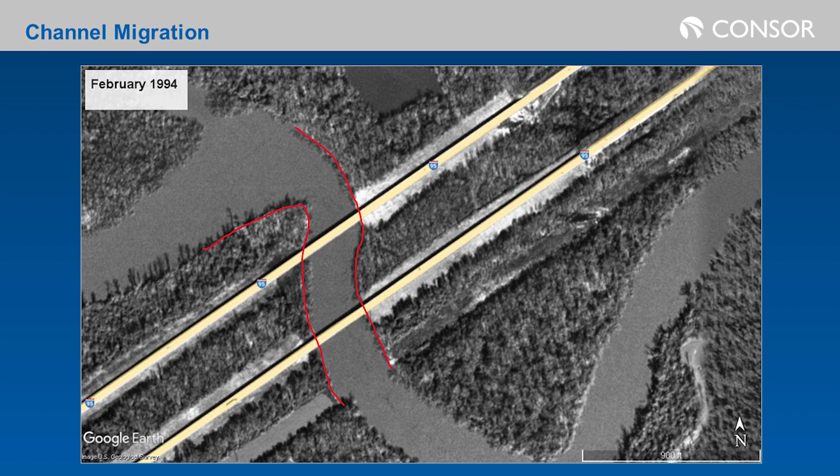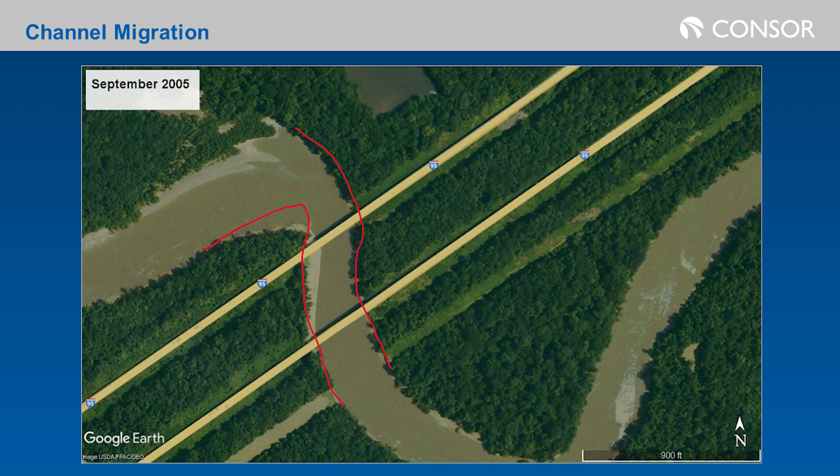We'll keep that red edge-of-channel line from 1994 shown throughout time so we can see how the river's moved. Jumping ahead just over a decade, you can see we're already starting to lose some of that channel on the northern section just upstream of the upper bridge—one of our first indications the river is trying to straighten itself out.

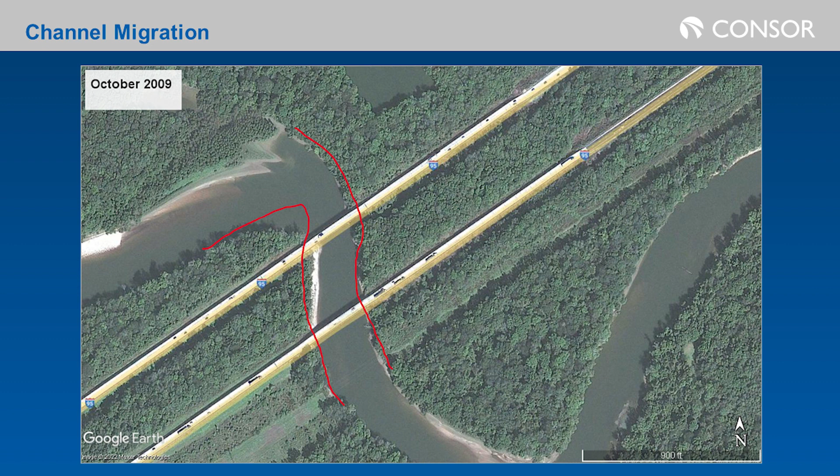By October 2009, nothing of major interest has happened yet, just a little more material loss. We're starting to see some infilling on that lazy bend inside the river between the two bridges on the left, which is even getting more vegetated.

Jumping ahead to January 2015—there was historic flooding in the fall of 2015 in South Carolina, plus events in late 2014 and early 2015. This is where we see the first migration to the northeast on our northbound bridge, delineated by the now light blue channel profile. This is when we first realized we were seeing migration that would be a concern going forward, and that we'd want to keep an eye on it during future high water events.

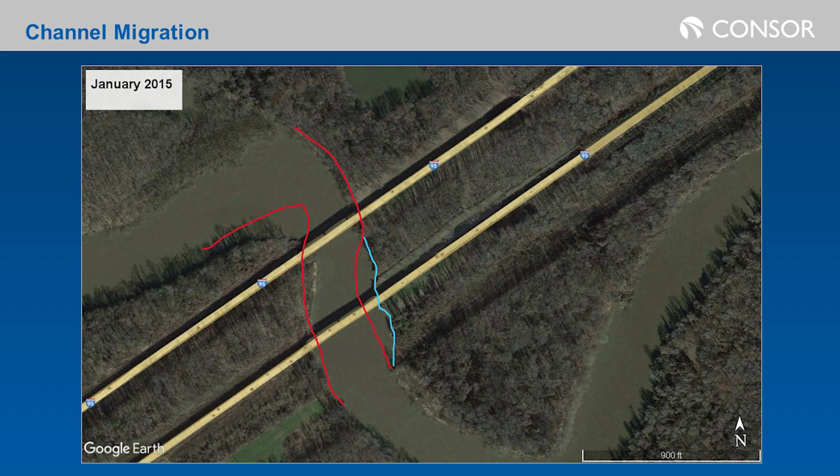By October 2017, as mentioned, the fall of 2015 had additional flooding, causing only a little more movement just downstream of our bridge. But once again, the channel is trying to punch through from the top left to straighten itself out and get rid of these bends in the river.

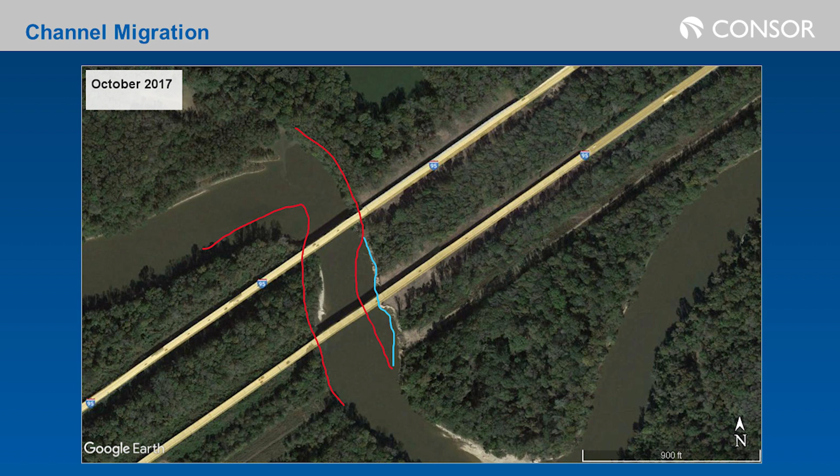Fast forward to the event that drove our repairs: Hurricane Florence came through and really walloped the entire Great Pee Dee River Basin through northeastern South Carolina and into eastern North Carolina. With tons of flooding, we responded and worked with South Carolina and North Carolina DOTs on post-flood assessments of about 300 bridges, ranging from culverts to washed out roadways. The big attention-getter was I-95, which Jeff will dive into deeper, since that's when we really realized how much the channel started moving during this storm event.

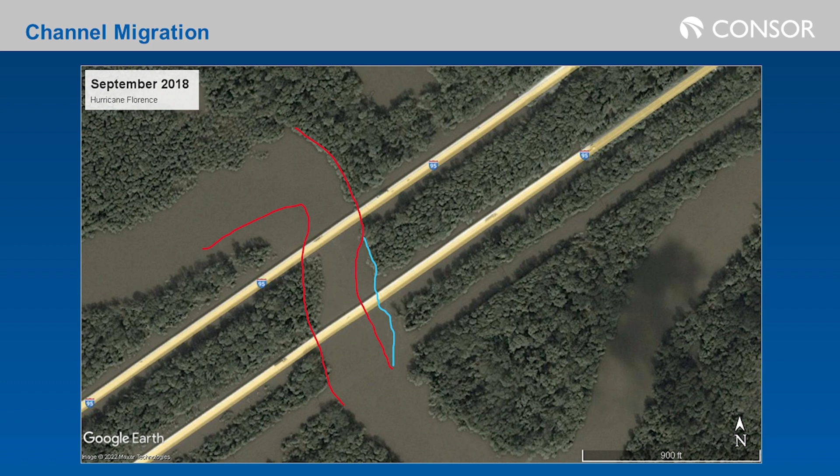As you can see, all the bridge approaches to the main channel span completely flooded, as floodplains do during high water events. After that storm, looking at the 1994 channel line, we'd lost a ton more material upstream of the southbound bridge at the top, and the channel had moved quite a bit further to the northeast.

This photo is actually post some of our initial repairs, but that's just showing you how aggressively that channel's been moving over time. Before Florence, in January of '18, just before this flood event, that blue line is right around where Pier M is on your left.

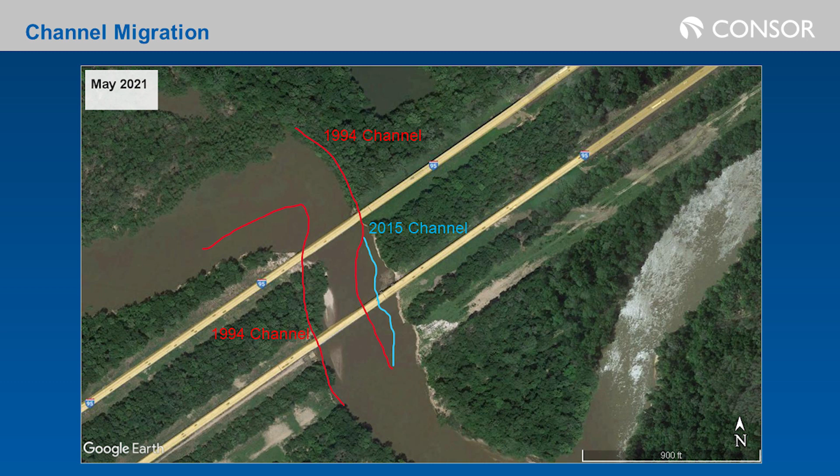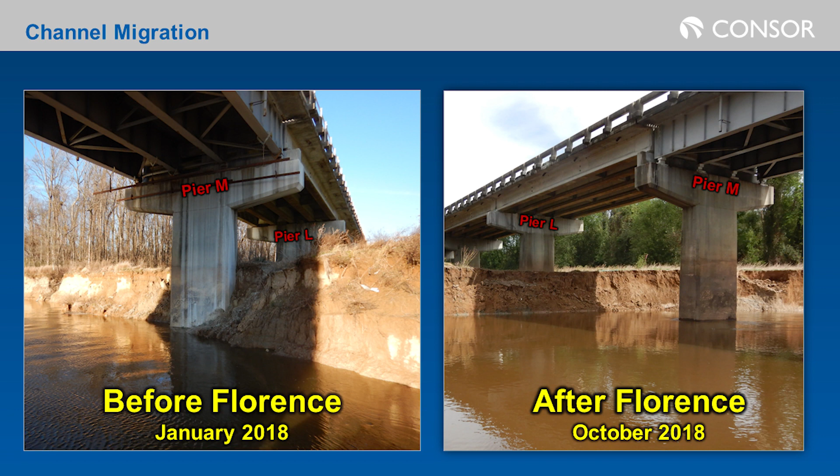After Hurricane Florence, our channel had jumped over another 65 feet to the northeast, putting Pier M, which had mostly been in the floodplain and monitored during routine inspections, into the channel. We started seeing it get into the channel around the 2016-2018 timeframe on the NBIS underwater inspections, to now being fully in the channel. Not only fully in the channel, it was now undermined about 10 feet high as well.

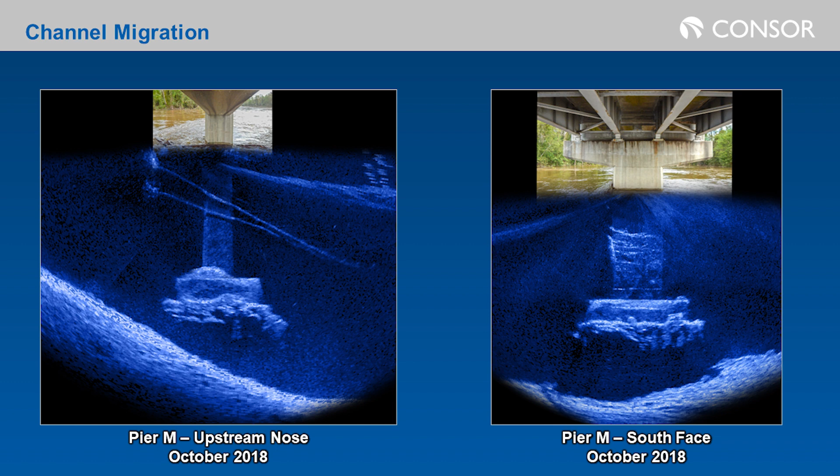So we can see the thalweg is really aggressively moving to the northeast. We've got about 25-foot long timber treated piles underneath there. While monitoring it, they started getting sounding data showing it might be undermined, so we brought in our acoustic imaging to verify the extent of that undermining and see some of the debris in there, so we could really get a handle on exactly how much scour we were seeing at that location.

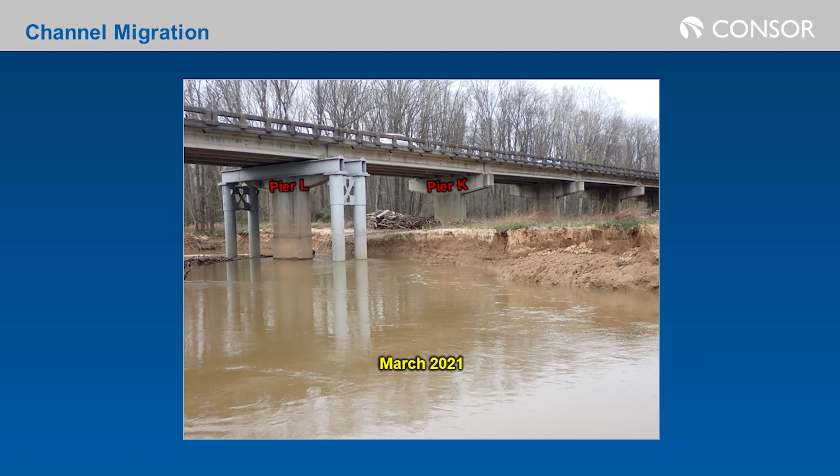Just a sneak peek, it kept moving even after we got repairs in place, which Jeff's going to talk about. As you can see now, Pier L is in the channel, also undermined today, but finally have some crutch bents in place. But why did we care so much about it moving over?

The approach is, the bridge is pretty flat, no real elevation changes on the structure itself. It's not a navigable waterway, so we're not too concerned about traffic moving up and downstream. Originally, that channel was around Piers N and O, off to the southwest in our original picture.

If we zoom in here, that sand-colored line is our original ground line that I tried to highlight. You can see over Pier N is the last pier in this blown-up section. It was originally in the channel. Pier M was out of the channel, and L, K, H, and all those were just in the floodplain. We never really thought they'd be in the channel.

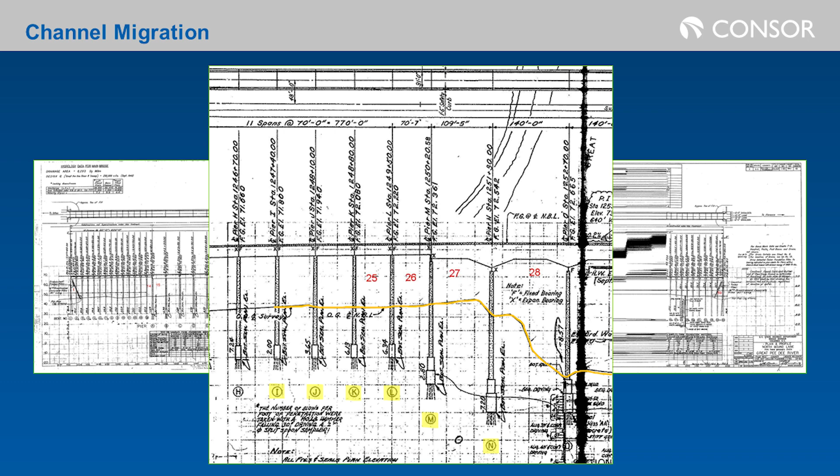If you look at our footing elevations from Pier N to Pier M, we're about 10 feet higher. Now Pier M, reminder, is in the channel after Florence. Pier M to L, elevations go up another 10 feet for those footings. So it's not just an issue of our channel dropping like we'd see with general scour, but with that migration, we're now migrating towards footings at higher elevations and starting to undermine those.

So that's where Jeff came in on the design side, starting some high-level meetings with the DOT to figure out what we could do to stabilize I-95 and keep it open to that vital truck traffic route.

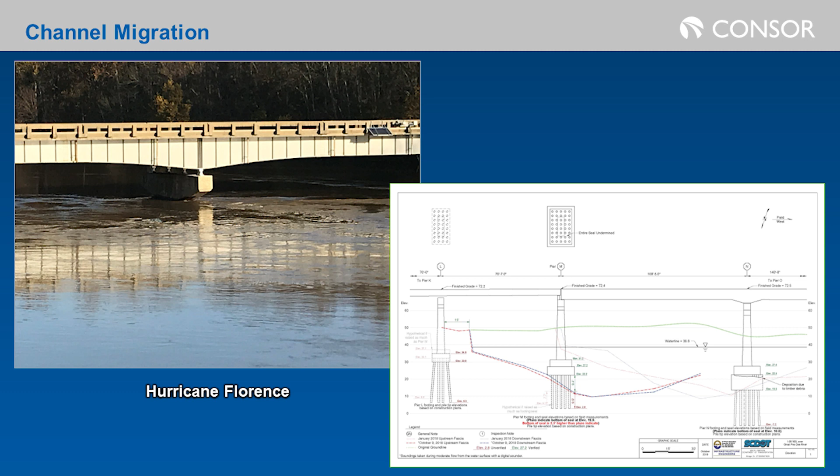Thank you, Michael. So we've been monitoring this bridge for a while. In fact, the DOT actually installed a camera on the southbound lane looking at the northbound lane. As the rains of Hurricane Florence fell, DOT and I were monitoring that through the camera. As we saw the water come up, the embankments disappeared in that picture and the floodplain revealed itself.

There was concern about what's going on underwater, but as we looked at the projections, the concern was how high that water was going to get. This was historic flooding in northern South Carolina and even North Carolina following Hurricane Florence, and projections showed the water was going to get up into the steel of I-95. So we actually worked with the DOT to shut I-95 down, afraid that bridge may be impacted from the water reaching the superstructure.

As the bridge was shut down, fortunately the water crested below where they predicted, and it only got slightly up into the superstructure. We were monitoring the channel bottom, and that's when we discovered that 65 feet of the channel had disappeared in a matter of days.

That was a concern because we weren't really sure what was going on with Pier M until we got the acoustic imaging out there and were able to determine it. Immediately the DOT said, we need to do some repairs to this, and we need to get those repairs in place.

The challenge was another hurricane was on the way. Hurricane Michael came through and dumped more water into the basin. We lost 60 feet. We were concerned.

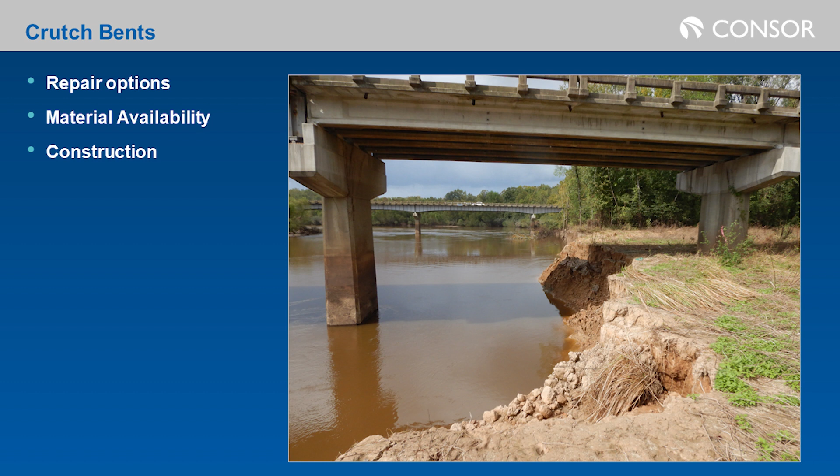So we were looking at repair options and material availability. This was before the supply chain issues we have today, so we had to ask, what can we get? And then also, what can we do construction-wise?

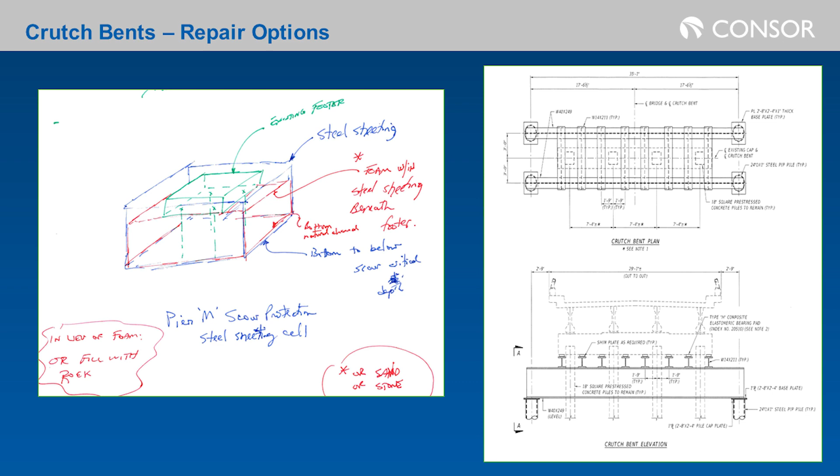Some of the initial concepts were sketched on the back of a napkin. Maybe we put in some sort of a cofferdam system and pump concrete around the footing at Pier M. We quickly realized that was probably impractical given the water level adjusting and the high flow against it.

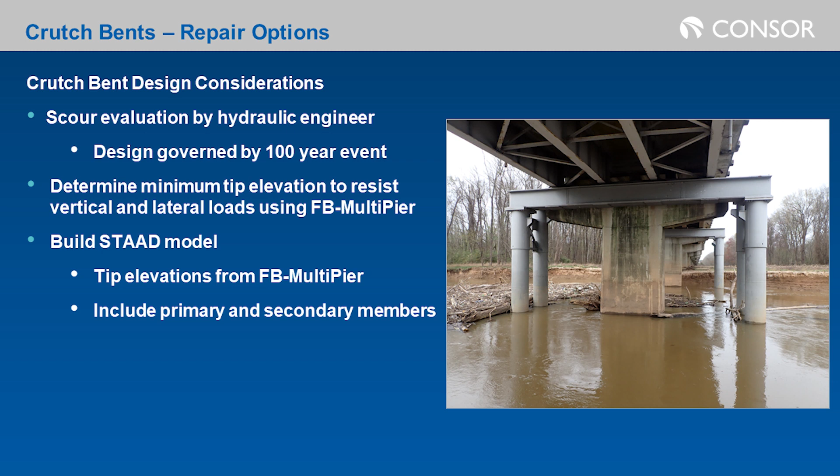So we settled into the fact that crutch bents were really our only option. This not only helped us at Pier M, but as we've talked about, the channel continues to migrate, even at an accelerated pace, and we wanted to be able to restore the structure.

So the initial focus was on Pier M. We quickly decided we needed to also do it at Pier L, which was on the bank at the time. As Michael showed, it continues to migrate, and now it's in the channel.

So as we looked at some of the designs, we had scour analysis showing the predicted scour was well below the pile tips of these piers, which weren't designed to be in the waterway. We ran through various models using FB-MultiPier and even a STAAD model to look at the dynamic loading and lateral loading on this, to be able to come up with the design.

That initial design was immediately shot down by the contractor. The material was not easily available. So we were back to the drawing board, and they asked, what can we get? They found some pipe pile down in Louisiana that they could get fairly quickly, so we changed our design to accommodate that availability.

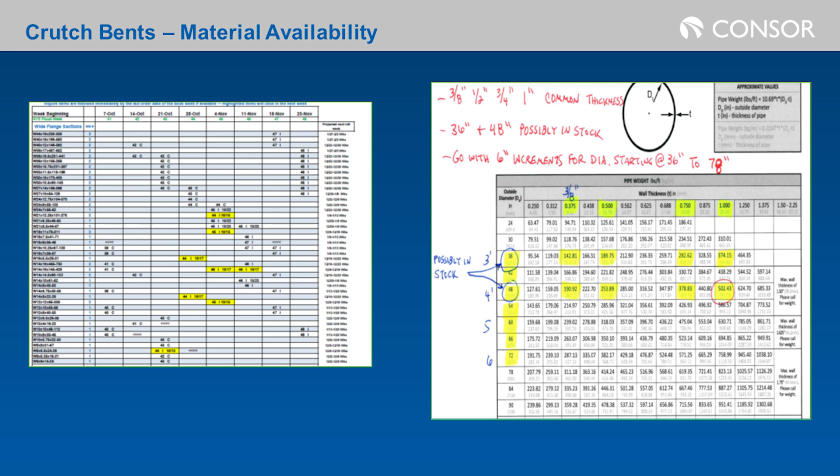We then looked at the superstructure, or the cross members, the horizontal beams that we needed, and that was very challenging to get in short order. Fortunately, the contractor had just demolished a bridge, US 301, and had that steel sitting in the yard. Members of our team went out, looked at it, and talked with them, saying yes, this could be a possibility. So we modified our design to accommodate the steel they had available.

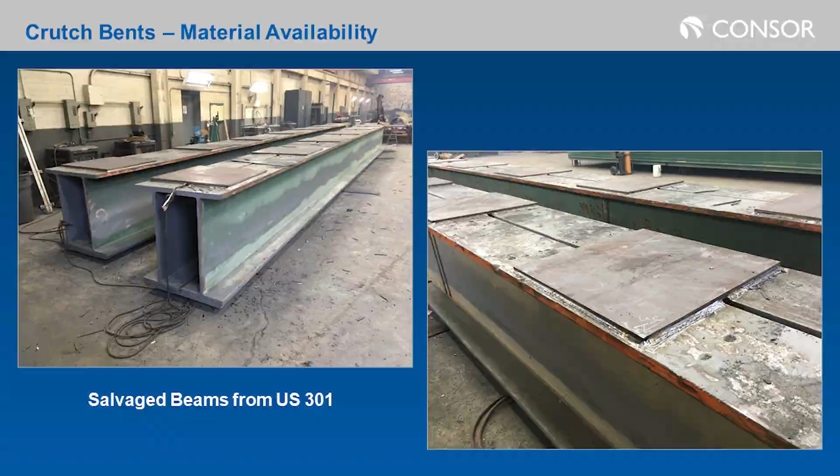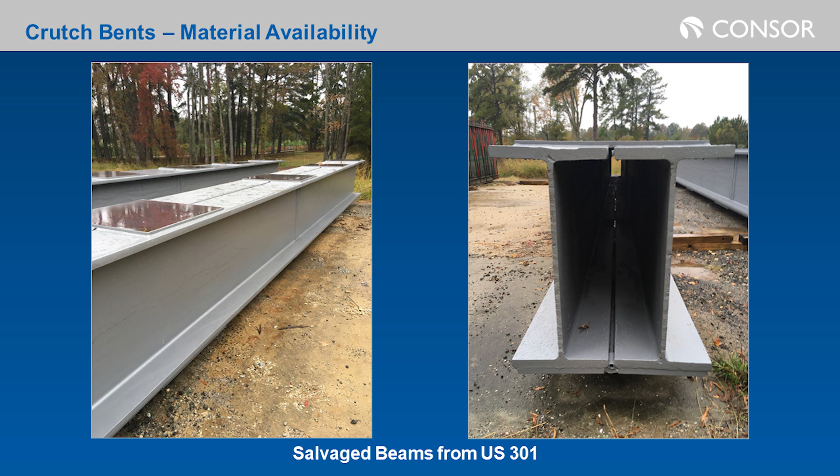We were able to sister a couple of these together, creating two cross beams used at the crutch bents, modeling and designing it appropriately. Fortunately, during fabrication they were able to find good sections of these beams to use. We fabricated them, cleaned them all up, painted them, and had them ready for installation.

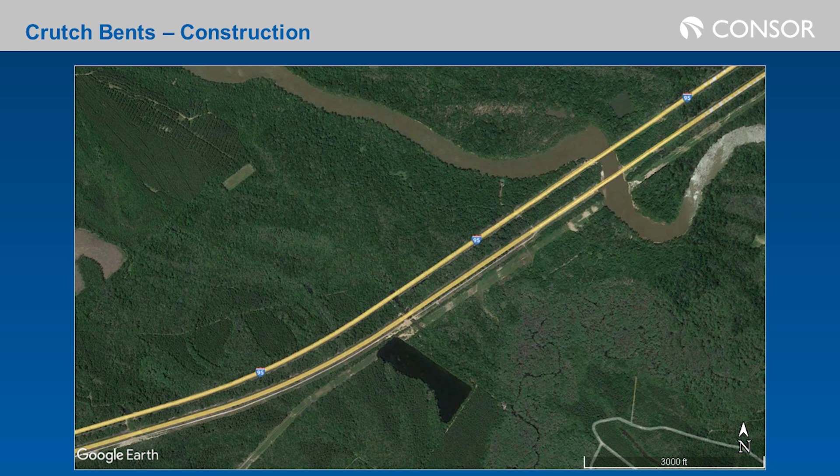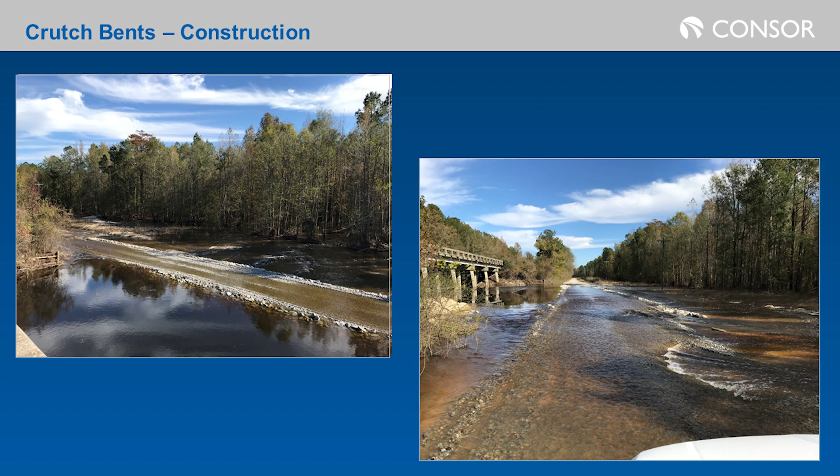The problem came in the construction. As Michael showed, this is in a floodplain over a mile wide. There's an access road along the northbound lanes, to the south in the lower part of the picture, and the contractor said they'd walk the crane out, put it on a barge, and use that to construct the crutch bents.

The issue is the Great Pee Dee, the river stage, goes up and down. You can see in a matter of days it shoots up and down in excess of 30 feet. Being able to construct in that type of up-and-down environment is very challenging for the contractor.

In particular, the access road would be overtopped and flooded. Time and time again they would start out trying to get their equipment and all the material out there, and all of a sudden the water would come back up and wash it away.

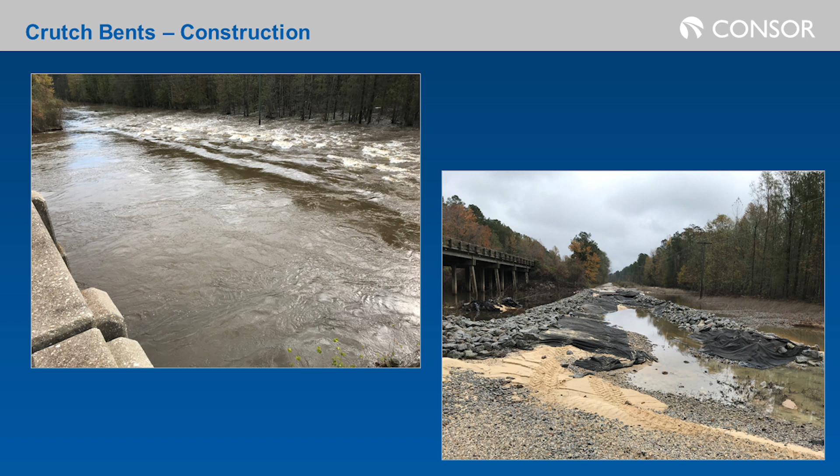So you would go from situations like the upper left, over the roadway, to coming back to find that as the water retreated, your road was completely washed out. I think they rebuilt this access road seven times just to be able to get out there.

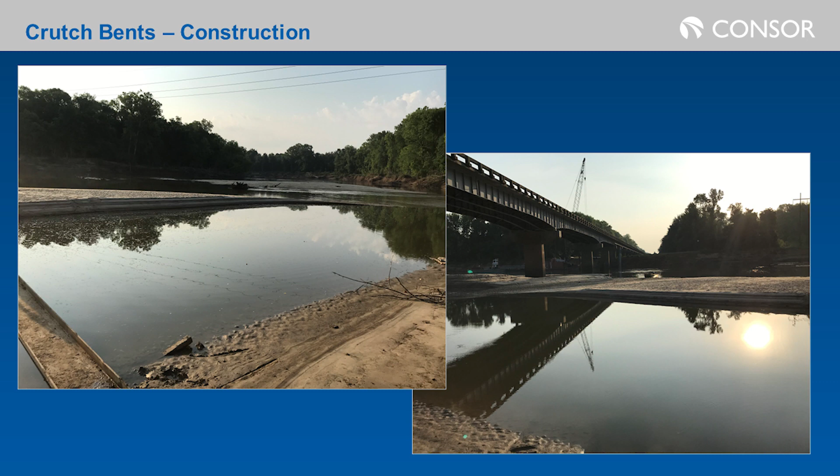The problem is, once the water went down and stayed down, you'd arrive at the river and now have sandbars you had to work around to get in. So the contractor struggled immensely to get this large barge and crane out onto the waterway, with no practical access upriver or downriver.

But eventually he was able to get the barge on the waterway with the equipment and material to start construction. Fairly straightforward in the sense that we set up a template to be able to drive the piles.

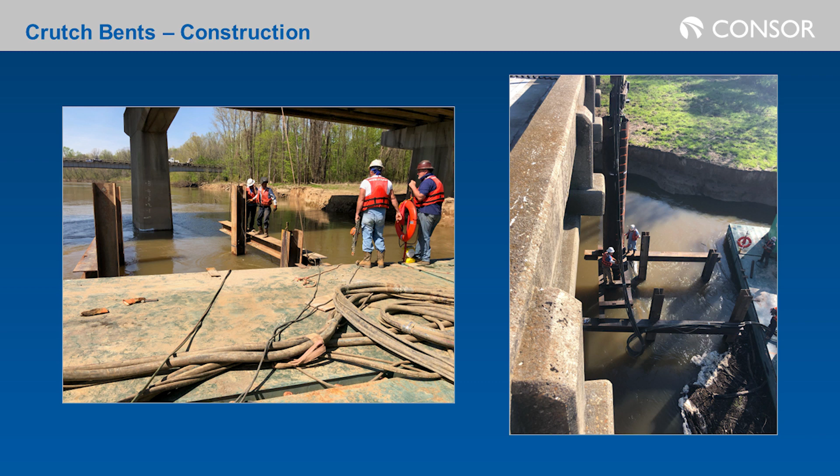The challenge was that we wanted to limit the overall size of this, since we had to design it to the material we had, and therefore the pipe piles were located fairly close to the road itself. So lanes were shut down as we drove these piles, to not impact the traveling public.

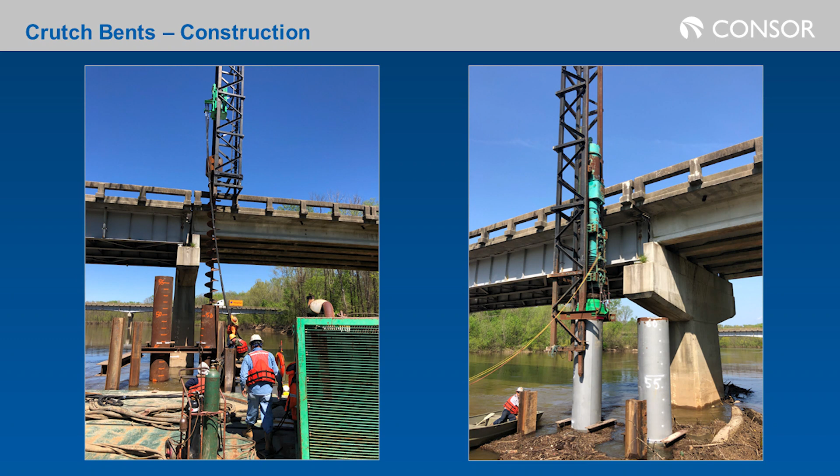We augered out the inside of the piles to a certain depth, then finished up driving the pipe piles to the required tip elevations, some 120 feet below the water line there.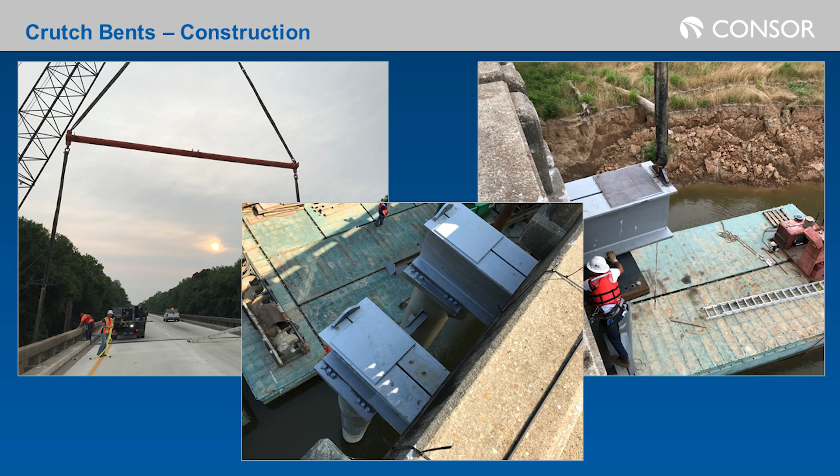It became very challenging how to install the cross beams. We initially thought they could do that from the deck of the roadway, but realized quickly that the bridge didn't have the capacity to set these. So they used a crane on the barge to set these in place, with lots of maneuvering to install the cross beams underneath the bridge itself.

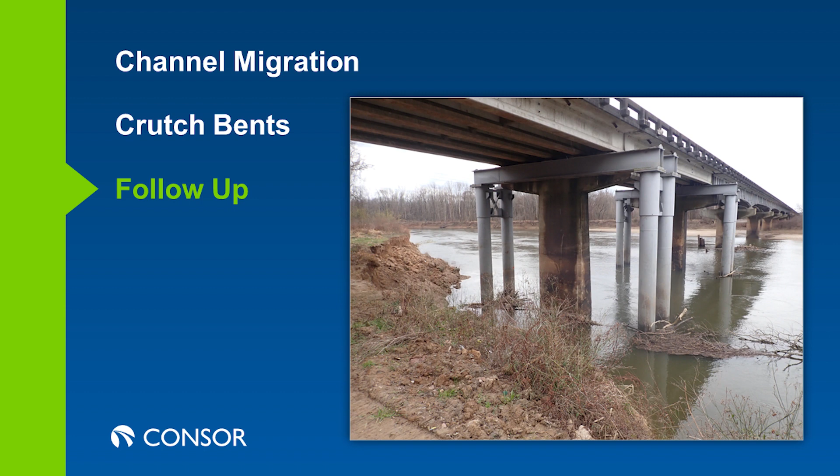You can see here the close proximity of the cross beams, two for each bent or pier, to the edge of the roadway, and how the installation took place. These cross beams were put up snug, with bearings also snug, and the entire crutch bent is designed to take the entire load of the bridge in the event that the pier fails.

Looking here at the end of the initial construction, both Piers M and L had crutch bents installed. After the installation of Pier L, shown here in the foreground, the channel continued to migrate, and now Pier L was completely engulfed in the river itself.

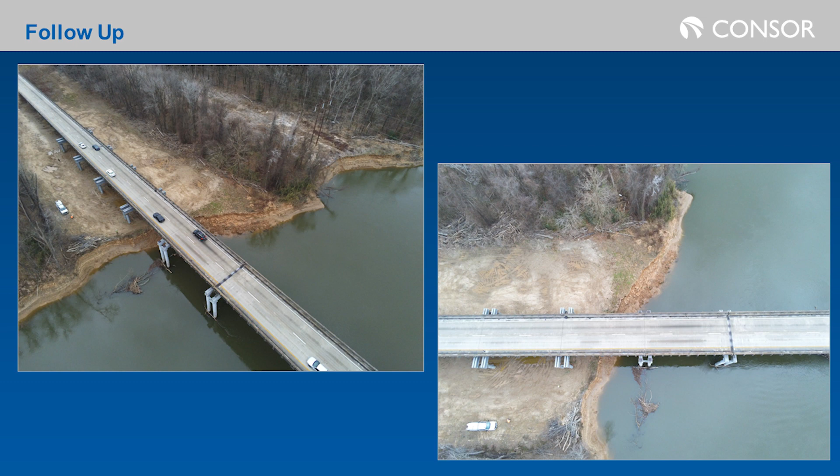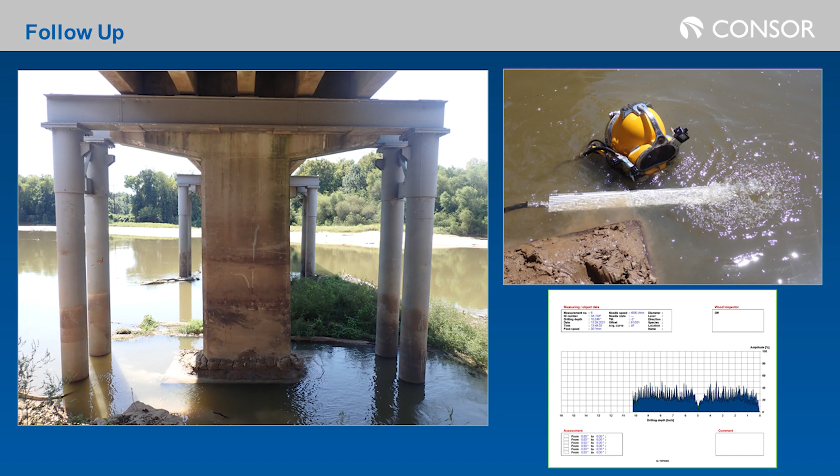Our most recent underwater inspection wanted to check the condition of the original pier along with the timber piles. So we took an underwater timber resistance drill, went under the footing, and did resistance drilling measurements on eight of the piles to determine their physical condition and make sure they weren't decayed or rotted out. All the piles we tested ended up in good condition, with only a very minor void in the core of one or two of them.

So we still have some confidence in the condition of the foundation from those original piers, but as Jeff mentioned, that channel still wants to straighten itself out. We didn't stop the channel from moving, but DOT made the decision to also stabilize the next four piers inland, so that during future flood events, as the channel continues to migrate, we can have confidence that I-95 northbound right there is still stable, with crutch bents in place to keep those piers stable and the bridge open to traffic.

We're also now starting to look at the southbound bridge as that channel continues to move around and how it's affecting those foundations. The foundation plan alignment isn't the same on the southbound as on the northbound, so we have some deeper foundations in different locations. But we are starting to more closely monitor that migration on the northwest side as it approaches the bridge, and we have a plan in place to catch those if the same type of migration starts happening there.

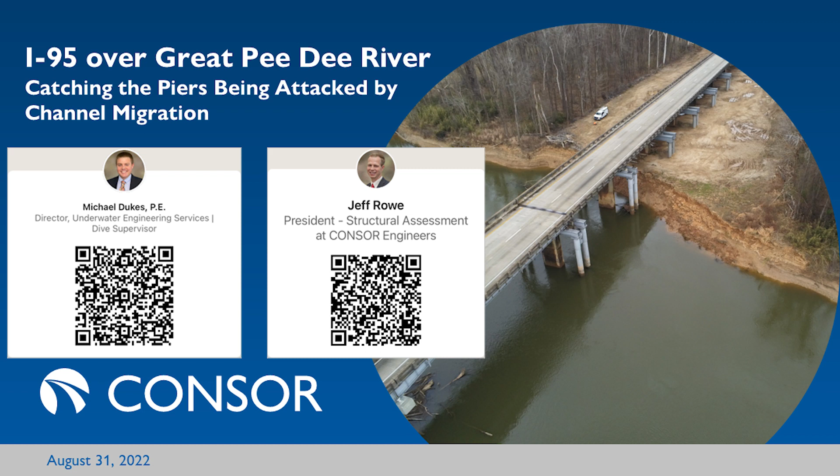So with that, I'd love to field any questions about the site that any of you may have about our repairs.

Thank you, first of all it was a great presentation. My question is, as you were looking around at the scour and trying to evaluate foundations you didn't even touch, was there a possibility of live bed scour there, and were you able to determine that? As you know, sometimes in certain rivers it fills back in, and you go there and measure down to the top of the soil, but the soil beneath it for a number of feet is not trustworthy. In terms of determining the adequacy of the foundations, that's a consideration.

Very good question, because we know that the most scour takes place at the highest flood event, and we were monitoring right at the crest of the flooding during Florence, so we felt we had a fairly accurate understanding of where the channel bottom was. As we conduct underwater inspections, obviously not during the flooding event, we do probe to understand that. But to your point, in the design we totally discounted any contribution from the existing piers or current piers, so that the crutch bents would take the entire capacity of the bridge itself. Because of that issue, we were concerned there could be infilling that would not be adequate.

I figured that for the crutch bents, but some of the other piers close to that area, I assume you evaluated those as well and determined you didn't need to touch them because there was no live bed scour and there was adequate soil left to support the bridge, right?